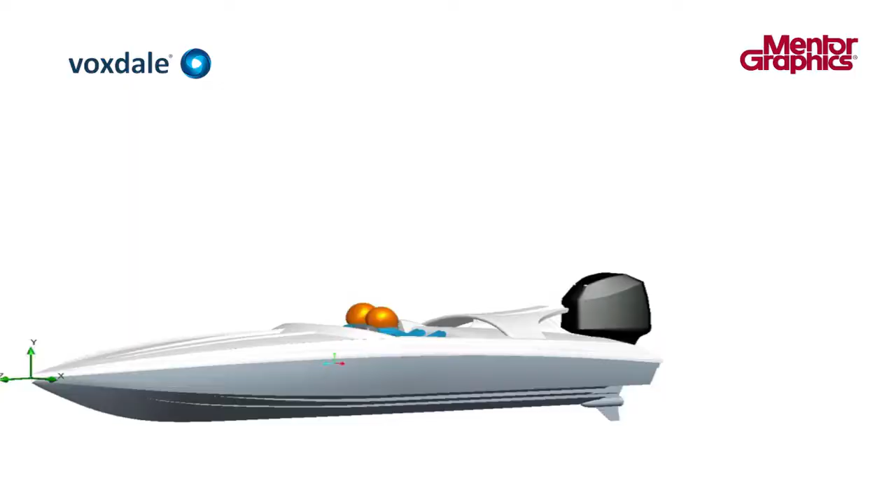In that design process, we use a lot of simulation and optimization tools. When we started the company, we had to decide on CAD and CFD tools. Keeping in mind that time to market has to decrease and that you need flexibility to check different variants and to optimize before you start building prototypes, we decided to work with FloEFD from Mentor Graphics. In fact, we've been using that, I think, for 11 years. It was FloEFD 6 at the time.

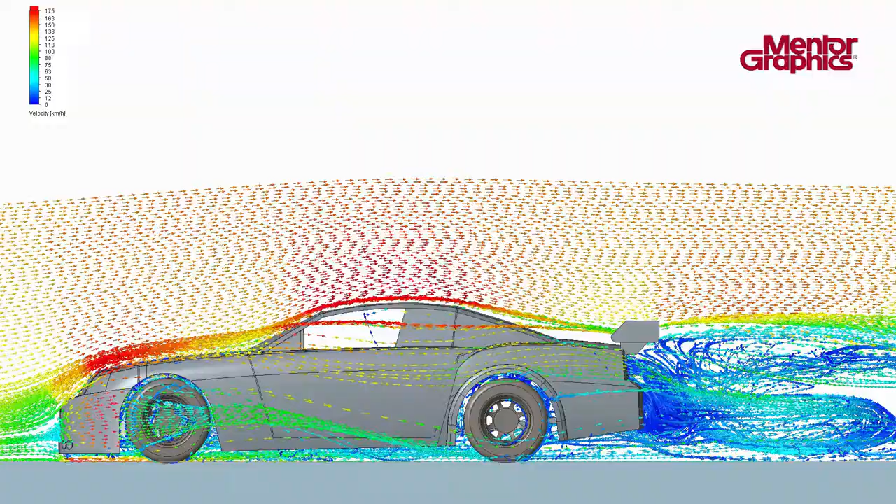And over the years, we've seen the tool evolving in functionality, in size, in speed. And it's great to use these kinds of tools to have early feasibility and risk mitigation at the start of a project. Customers expect us to take risks, and we can take these risks in these simulation models. One of the main challenges we have in our CFD work is the validation of our results. And that's why we participated in the Flanders Bike Valley Wind Tunnel project.

So this is a very early mock-up of the Flanders Bike wind tunnel and the building. Voxdale was involved both in the conceptual design of the tunnel and in the aerodynamics of it. You have to imagine this is a multi-million euro project. You have to come up with a design and then you have to take the step to really build it. And that might be a risk. Imagine that it doesn't perform as wanted or that it just doesn't work very well. And that's where we stepped in with FloEFD.

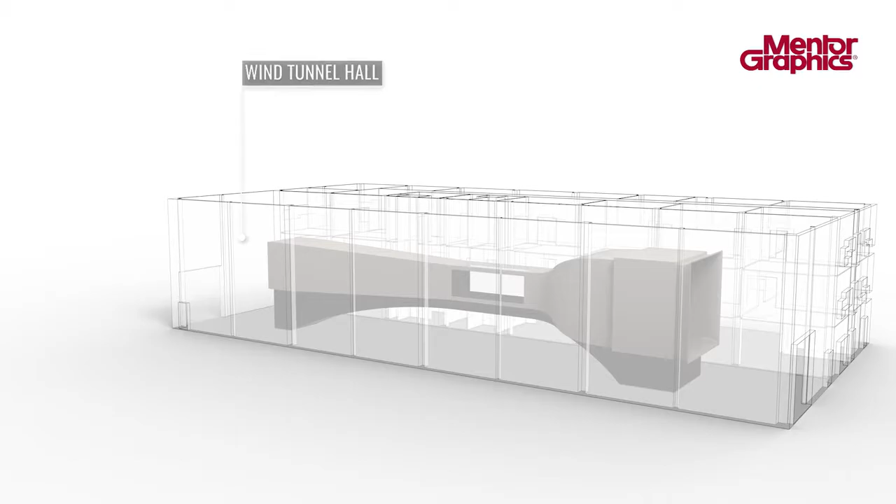So we modeled the contraction section, we modeled the test section, the diffuser, but we also modeled the hall around it. As it is an open return wind tunnel, we had to simulate and visualize the flow back from the fans towards the contraction section. And that gave us enough confidence to validate the design of the tunnel itself and to have the correct dimensions of the hall. We are here today in the facilities, brand new facilities, so let me show you around.

So here we are in the wind tunnel hall. Voxdale was highly involved in the design of the tunnel, both aerodynamically in FloEFD, but also structural and architectural. When designing a wind tunnel like this, a lot of decisions have to be made. The size, the performance, the speed, the type of wind tunnel, but also budget-wise, it's a complex exercise. So when all design and aero decisions were made, we came up with this unique object. We're very proud of it.

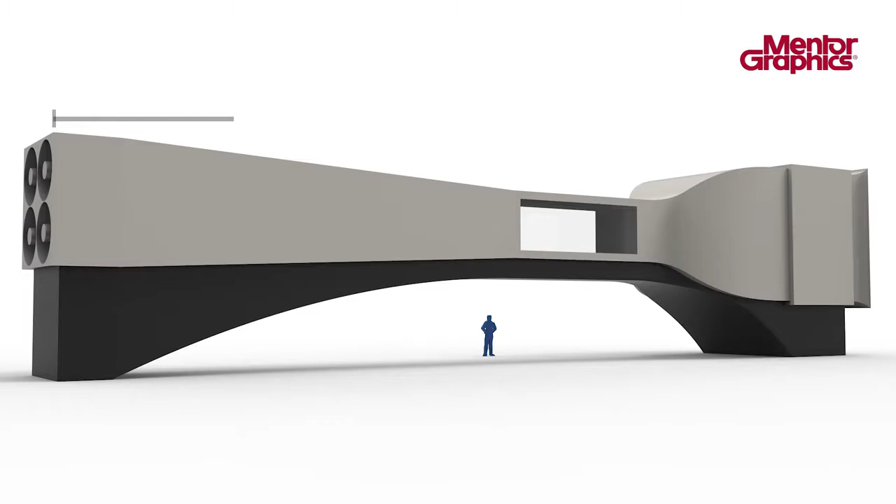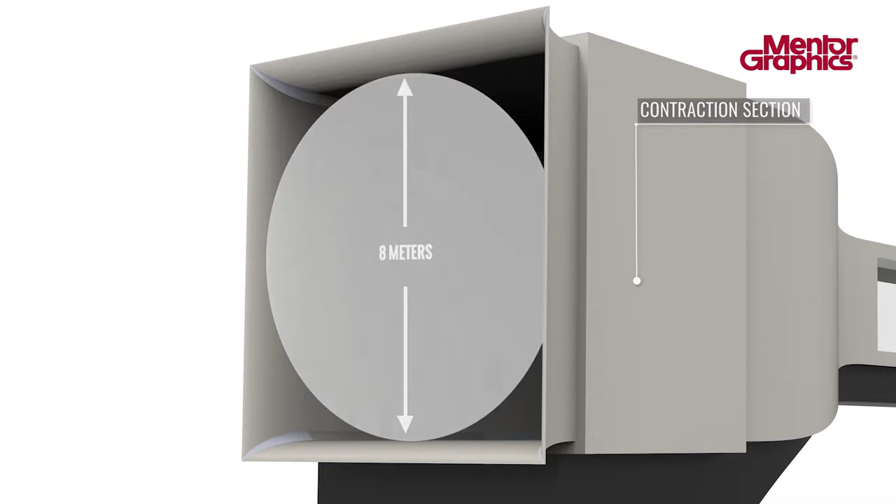It's an open return, low-speed wind tunnel. It's about 50 meters long, 600 square meters of surface. Here you can see the contraction section. It's 8 meters in diameter. It guides the flow laminar towards the test section. The test section is 2.5 meter diameter, 6.5 meter long. And it ends up in the diffuser section leading to the fan.

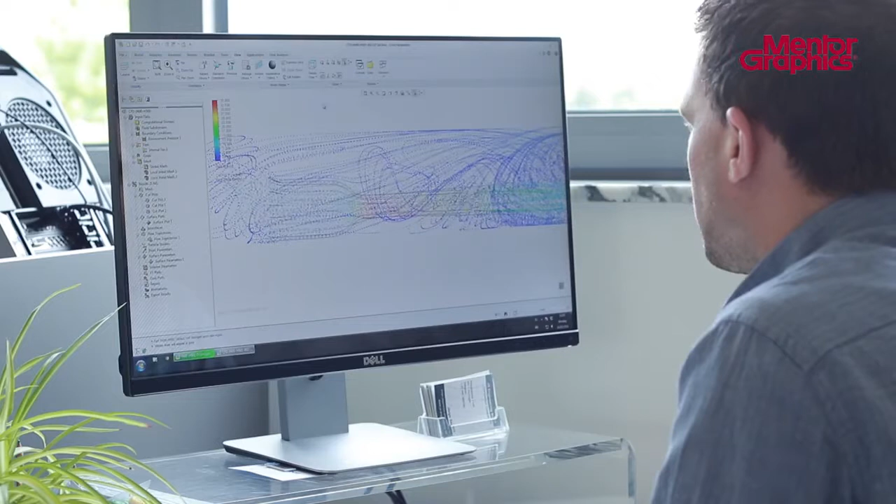Next to the calibration of the tunnel, which is going on as we speak, we are working on a digital replica of the test section in FloEFD. This will enable us to prepare the tests virtually. Having a virtual test section like that will facilitate the preparation of the wind tunnel use.

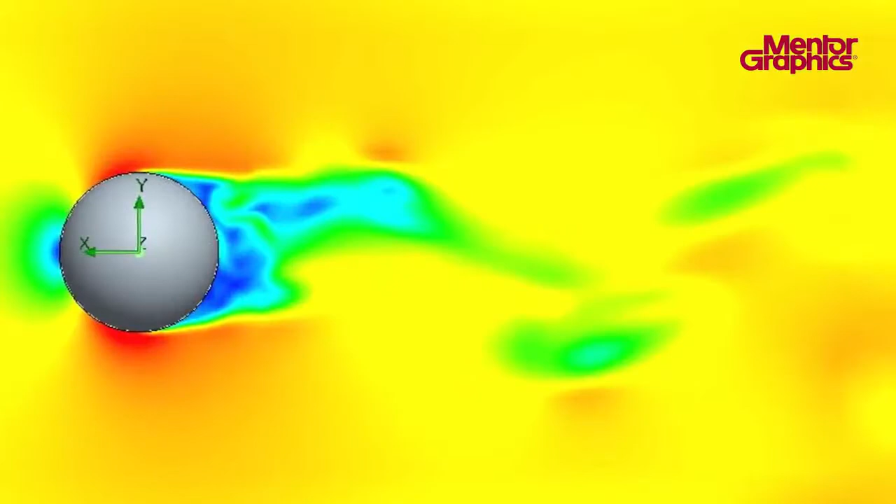After that, we can use the correlated results of FloEFD compared to the wind tunnel test to further develop in FloEFD. So instead of spending 2 or 3 or 4 days in a tunnel, we would propose to just do a preparation of 3 or 4 days in EFD, go 1 day in the tunnel, grab those results and go to FloEFD again to validate in a second phase in the tunnel.

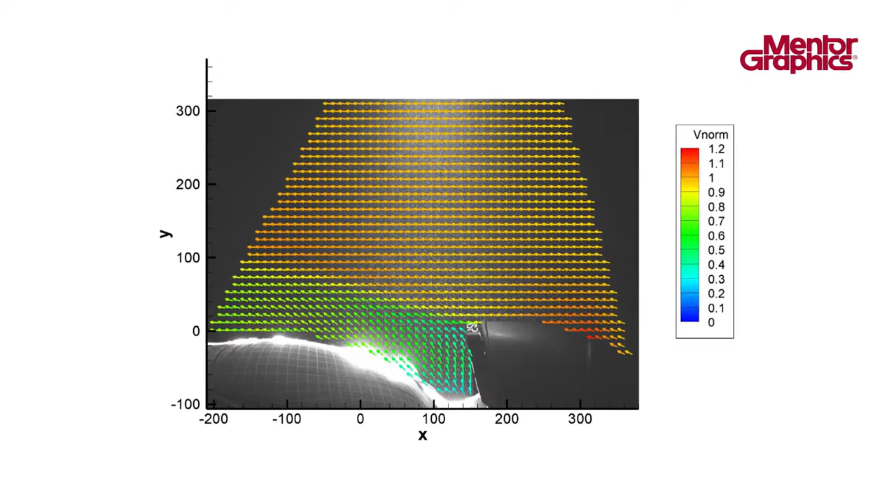Here we are in the control room. In this control room we can operate the fans, we can read out the load cell, and we can work with the PIV system. And that results in CFD-like images with flow velocity. We can visualize simulation. So these types of images really make it very convenient to compare our FloEFD predictions with our wind tunnel output. Let me take you to the test section.

Welcome to the sacred place. We are now inside the test section of the wind tunnel. 2.5 by 2.5 meters in section and 6.5 meter long. At the rear end you see these 4 huge fans. At the other side you will see the contraction section.

Here we have the interface plate of the load cell. It's now equipped with a bike, but for instance we are working on a new bobsled for the PyeongChang Olympics in 2018. So we will have to modify or have another interface for that.

On the right hand side you see the green screen. That is used for the PIV system, of which you can see the laser at the left hand side. So this laser casts a sheet of light into the test section, and the camera on top will then take the CFD-like pictures of the velocity and the flow direction.

It's a real thrill to be able to stand in this test section. We are really proud of this project, and it's almost unbelievable what we have materialized in this short period of time to end up with this F1-like facility.